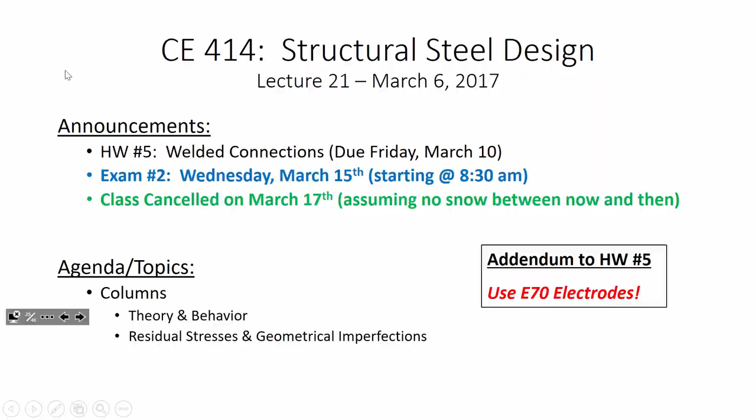All right, so real quick, before I pull up the solution, a couple things. Your homework 5's due on Friday, March 10th, and I didn't actually explicitly tell you what electrodes to use on that homework, so just go with E70. Exam 2, March 15th. Don't forget that. We'll have review on Monday. We'll have the exam on Wednesday, and then assuming no snow between now and then, we'll cancel class on Friday. Sound good?

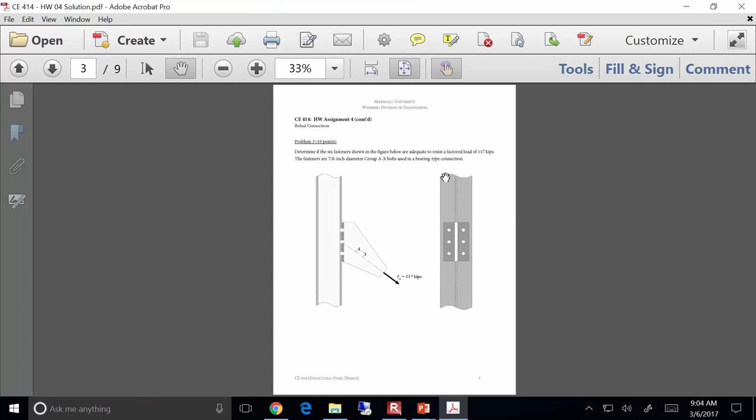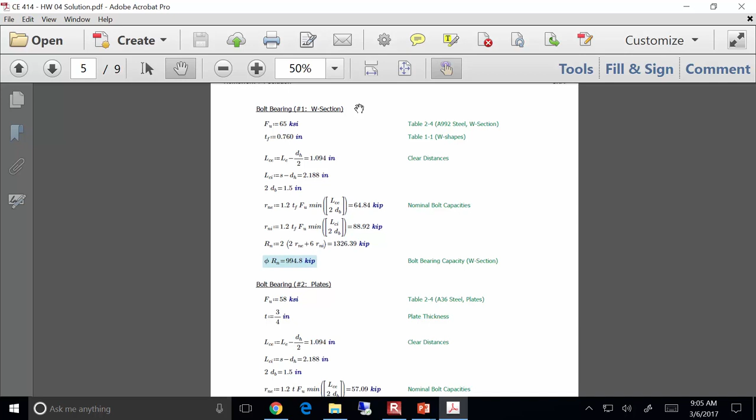Okay. Let me briefly pull up the solution, and like I said, I think everybody did pretty well on the homework. I'll show you the mistake where all the +1 stuff showed up, and it was really right here, and I'm going to pass out a copy of this solution real quick. On problem 1, if you notice, there's 2 cases of bolt bearing: the bolt bearing for the W section and the bolt bearing for the plates. I had the wrong FU value right here, so it was just a typo on my part. But the TA didn't know any better, so he deducted for everybody, grading each problem one at a time. When I noticed it, I emailed the TA and asked him to fix that, and he did. So if you have a +1 on the bottom of your homework, that's where that is. If you see something like "wrong FU" marked on your homework, it should have been corrected.

All right. In the meantime, let me at least go through and pass out the solution. I'd argue this solution is probably a little more hefty, in terms of the next test, than the solution for homework 5, since that's only 1 problem. 2, 3, 5. There's that. 1, 2, 3, 4, 5, 6, 7. 4. 1, 2, 3, 4, 5, 6, 7. Here we go. And 2. Mr. Lewis. Okay.

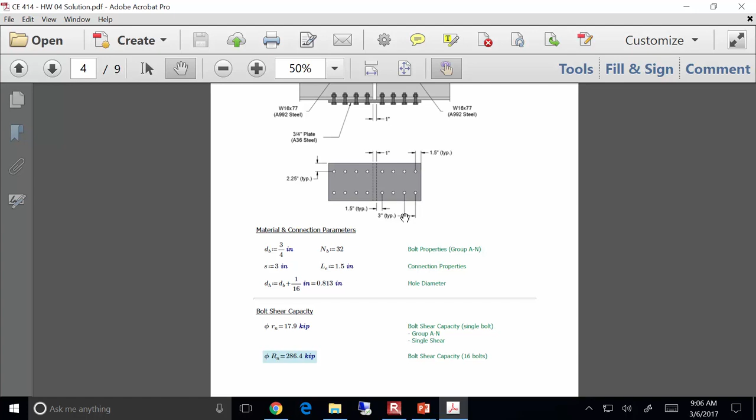So I think the big thing with this homework was that it was pretty repetitive, but it sort of is the nature of the beast when it comes to bolted connections, because you end up checking bolt bearing at least twice, and it's sort of the same thing on both checks. One of the things I think probably gave a few of you a loop a little bit is if you check the bolt shear capacity of the connection, you get something like 286 kips. But if you check bolt bearing, you're getting some crazy numbers like 994 and 876, and that's fine, okay? Because all that means is that if you start loading this connection, the bolts fail first. That's all that means. There's nothing wrong with that check at all. So the actual capacity of this connection would be the 286. You don't know that until you go through and do the math and check it out.

I'd say that for connections that have a large number of bolts, it's a pretty common instance that bolt shear governs, because a lot of bolts means there's a lot of plate you've got to fail in order to fail that connection. Okay, so that's problem 1.

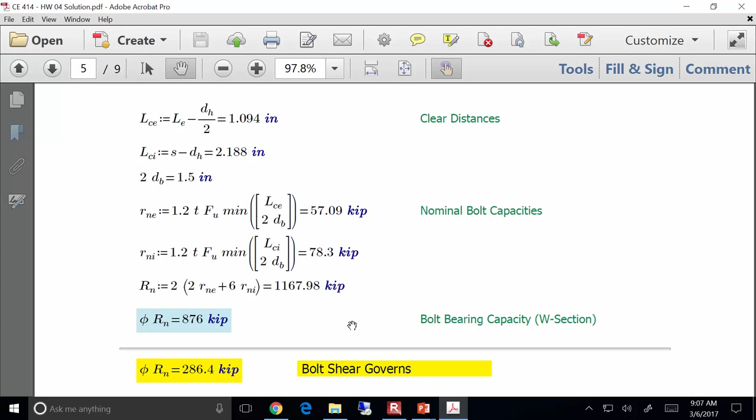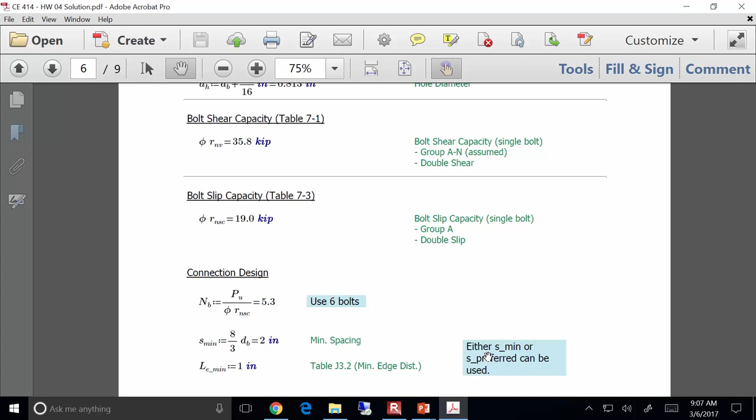Now, I imagine on problem 2 there are probably going to be some differences on the actual connection layout. In other words, do you use the minimum bolt spacing or the preferred bolt spacing? In my solution, I use the minimum, because first off, you get nice, easy dimensions. They're all 2 inches and 1 inch. It's pretty straightforward. But I wanted to show you that minimum will work from a bolt bearing standpoint. So if S minimum works, S preferred is obviously going to work.

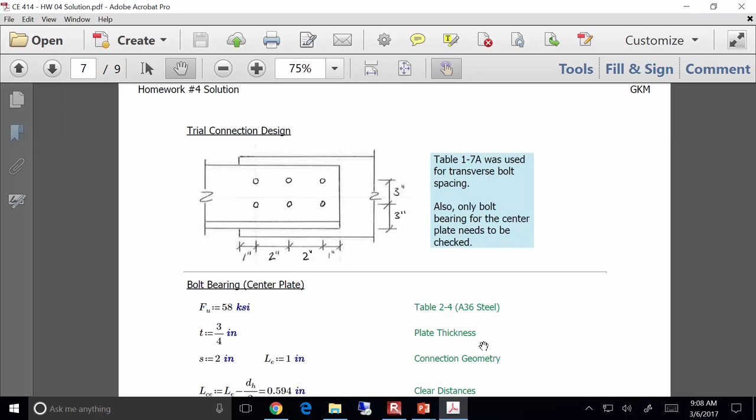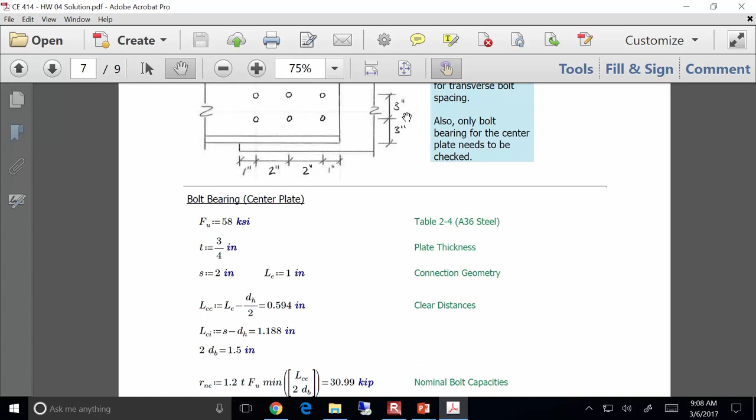So here's the trial connection design. There are 6 bolts. The edge distance is 1 inch and the bolt spacing is 2 inches. If you go through and do the bolt bearing calcs, you only need to do it on the center plate, because there's a lot less thickness of material in that center plate as opposed to the angles. You find that when it's all said and done, it works.

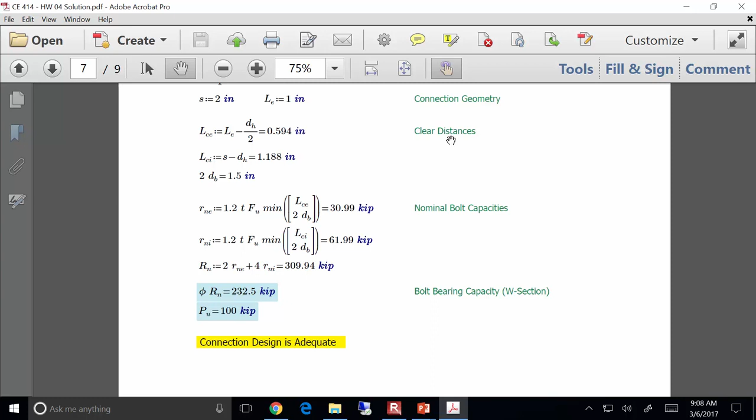Now, some of you look at these 2 numbers and go, well, gosh, that connection's not very efficient. But when you do that, you're forgetting that there's bolt shear, bolt slip, and bolt bearing. The value that governed the design of this connection, if I remember correctly, was bolt slip. The capacity per bolt is something like 19 kips. So what's 19 times 6? 60 and 54, so that's 114. So the actual governing capacity of this connection is 114 kips. Take 100 and divide it by 114, and there's your efficiency.

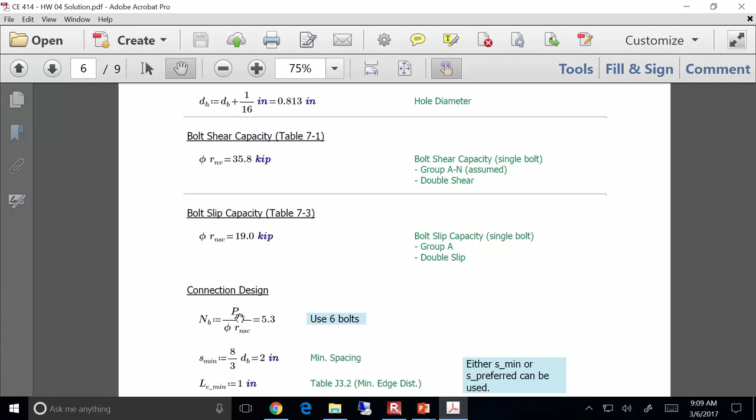Now you can find that bolted connections, by their very nature, are a little less efficient than a typical member design. When you do the math, you find that you need 5.3 bolts, so you round that up to 6. You're actually rounding that up quite a bit. So your efficiency for connection design, especially with bolted connections, can be a little lower than you'd like, but it's really just the nature of the beast in regards to bolted connections. Does that make sense? Everybody okay with that?

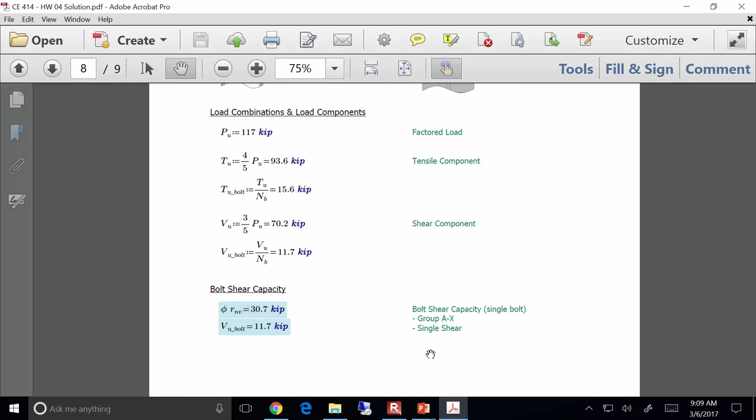Problem 3, I think as long as you were being diligent in your numbering and your naming and your labeling, was pretty straightforward, pretty plug and chug. You find that the connection is adequate. Does anybody have any questions at all about any of this?

And it would have worked. Did you get docked? You did get docked. I used S preferred, so I got something different than what's on here. I wasn't aware the TA did that. How many of you used S preferred and got docked? I need hands raised. How many? Just 2 of you? All right. You come see me a little bit after class. I want to look at that because you shouldn't have gotten docked. He's a human being. If he made a mistake, I'll be happy to fix it. All right. Sound good? Everybody else good?

Okay. So are there any questions on the welded homework? I get the feeling not everybody started it, but it's a really short homework, so it should be pretty straightforward. Everybody good? All right. If that's the case, I do want to get into columns today.

I'm going to go ahead and level with you. Things get a little different in here, starting with columns and beams. I would argue the analysis and design aspects associated with columns and beams are a 180. We're entering a little bit of a different world. I'm going to have to bring up a little bit of the C word, a little bit of calculus, but it won't be so bad the way that we handle it. We enter a whole different type of discussion starting now and throughout the rest of the semester, because with columns and beams we now broach a completely different topic of structural engineering, and that's the topic of stability.

We've been talking about, up until now, things that are being yanked on. Tension members, even if you're talking about bolted, welded connections, regardless of the complexity associated with the geometry, in the end you have a series of plates going this way and a series of plates going this way, joined with either bolts and welds, and they're being yanked on, essentially, in some fashion.

That's the nature of tension members and bolted and welded connections. And ultimately, our limit has really been something like fracture or bolt shear. And the design aspects have been pretty straightforward. I mean, say what you will, but theoretically, the design of a tension member is pretty simple. You have the load, you have the stress, divide to get the area, right? That was really it. You have bolts, have the load, capacity of one bolt, divide to get the number of bolts. It's pretty simple. Well, that stops right now, because with compression members, it's not so simple.

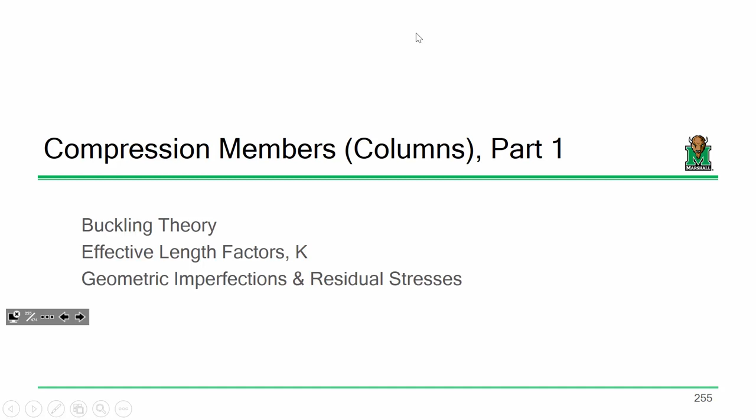Things that are in compression like to do stuff that things in tension don't like to do, specifically things in compression like to buckle, okay? So we need to talk a little bit about buckling and how we have to adjust our theory to handle real-world behavior. So we're going to find a term pop up that we've seen before, and it was just sort of a passing thought, which is going to become really important to us now. Things in compression like to buckle, and specifically a column's strength is a function of its slenderness.

You remember how we defined slenderness with tension members? How did we define slenderness? L over R, okay? Now, that's the same thing for us in columns. Although specifically it's going to be KL over R because we adjust that by the column's effective length. But slenderness is really going to be a very important parameter for us. And we're going to find that columns behave differently depending upon their relative slenderness values. For instance, I would say columns that are short are the only columns that can really be loaded to the yield stress. The longer a column gets, the weaker a column gets.

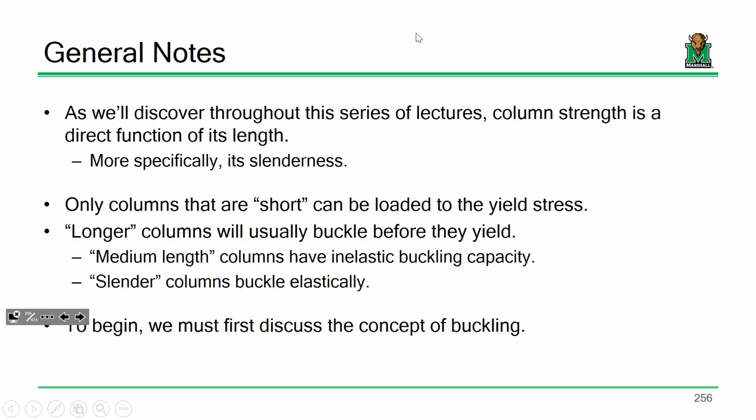And that wasn't the case with a tension member. We didn't really care how long the tension member was for its capacity. I mean, the capacity of a tension member was 0.9 Fy Ag and 0.75 Fu Ae. The length didn't matter, okay? For columns, that's going to matter, okay? And we're going to have differences between whether or not a column buckles inelastically and whether or not a column buckles elastically. There are going to be differences in behavior. But before we even get into that, we got to go into buckling.

Now, if you had me for deformable, we did talk about buckling at the end. If not, no big deal. I do want to at least go through some of the basic theory. So, you imagine you've got a yardstick in your hand. You take that yardstick and you push on it. The yardstick tends to want to bow out, right? You push it, and whoop, it starts to bow out. That sudden loss of stiffness is what's called buckling. Buckling is a geometric loss of stiffness due to loads in compression. By and large, that's a general description for it.

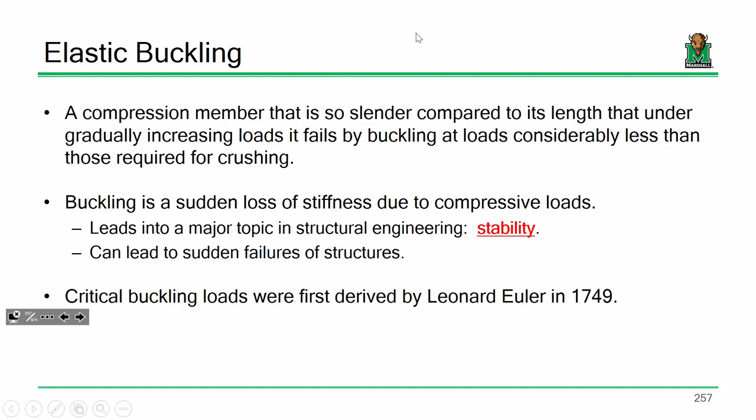It's an old idea. I mean, the equations for Euler buckling were derived back in the 1700s, so it's not a new concept. Some of you probably remember the equations for Euler buckling. Now I'm going to show them to you, and then I'm ultimately going to show you why they're wrong. Or wrong's maybe a bad word. Maybe the best word is they're not accurate enough, and we'll go into why that's the case. But first off, let's just sort of go back to basics. So let's consider we have a pin-pin column.

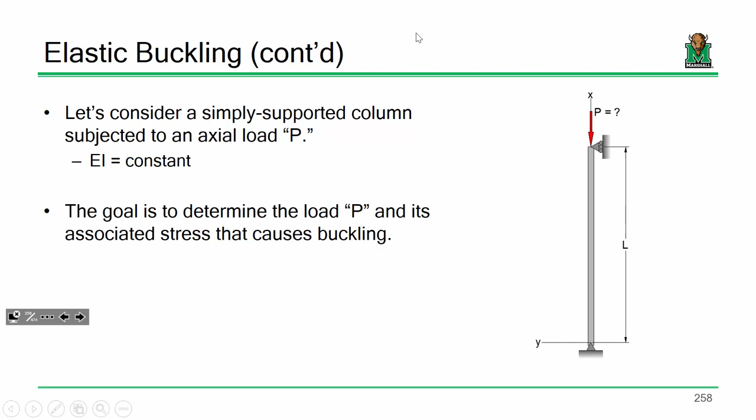So instead of a pin-pin beam, we're talking about a pin-pin column that's being loaded in compression. So that column has some length L. It has some modulus of elasticity E and some moment of inertia I, right? So I've got some load on it, and I want to determine the amount of load that will cause that column to buckle, right? Now, would you agree that if I load that column in compression, that when it buckles, it's probably going to look something about like that?

Fair statement? Okay. So that's number one. Number two, if I've got P going down, statics tells me I have to have P going up. Fair point? Okay. All right. So you know me, my favorite weapon is a samurai sword or a lightsaber, or in this case a box cutter. I cut right through the column at some distance x from the bottom, and I get a situation that looks something like this. So statics tells me that if I've got P going up, I've got to have P going down. But because this column is deflected out a little bit, I'm proposing that there's a little bit of moment in that column. And that moment is directly proportional to how much it's deflected out.

If I cut a section, that column is deflected out, we'll call it some distance y. So if I sum moments at the cut, I've got some moment going like this, and I've got P at some distance y going like that. So the moment inside that column is P times y, or negative P times y because of our sign convention. Everybody okay with that? Any questions?

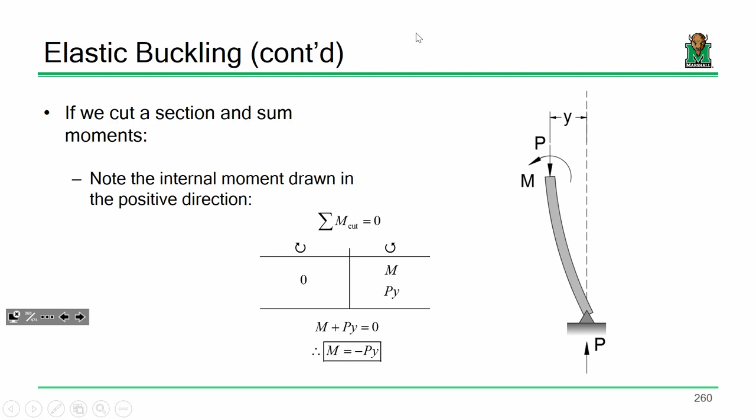All right. So let's go back to some basics. Whether or not you had me for deformable, you definitely had me for structural analysis, and I know you remember that the second derivative of deflection is M over EI. It was a very fundamental relationship that we established in structural analysis to be able to determine deflections in beams. We're still talking about the same scenario, an element undergoing bending deformation. So the second derivative of deflection is M over EI. Everybody remember that?

You're giving me that look. You remember that. I know you do. All right. Yes, you do.

So if the second derivative of deflection is M over EI, and M from our equilibrium analysis was negative Py, I can plug and chug and I can get this. Everybody okay with that? Now, I'm going to simplify it a little bit. I'll move this over here, so I've got y double prime plus P over EI times y equals 0. To make the math simpler later, I'm going to define P over EI as an arbitrary constant and call it alpha squared. What that yields is a second order differential equation, second order because we have two derivatives. Everybody all right with that?

Now, I see some people going, no, sir. You've got a second order differential equation, and a number of methods that you can use to solve it. I'm going to use the one that I think is most popular among college students. So, y double prime plus, since I don't have alpha, I'll just call it A. This is a very common differential equation: y double prime plus A squared times y equals 0.

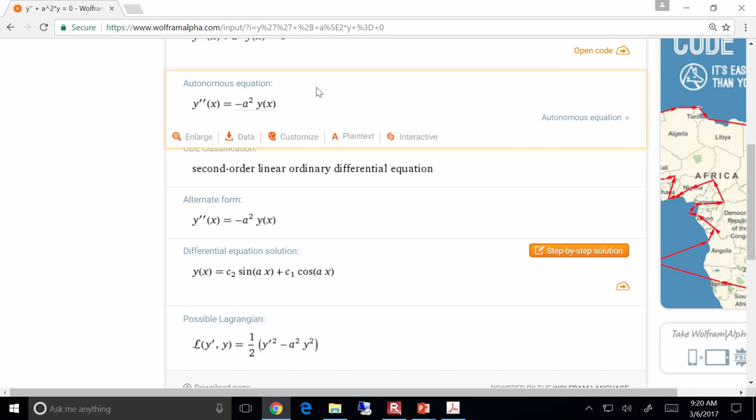Now if you want, you can do the mathematical process: write your characteristic equation, get imaginary roots, and recognize that imaginary roots are conjugate pairs, sines and cosines, if you've had differential equations. I'm being facetious, but in all honesty, this is not a very difficult differential equation to solve. It's pretty straightforward. If you've got a differential equation in this format, then the solution is some arbitrary constant times the cosine plus some arbitrary constant times the sine. The reason I called that term alpha squared is because the solution yielded alphas. Everybody okay with that?

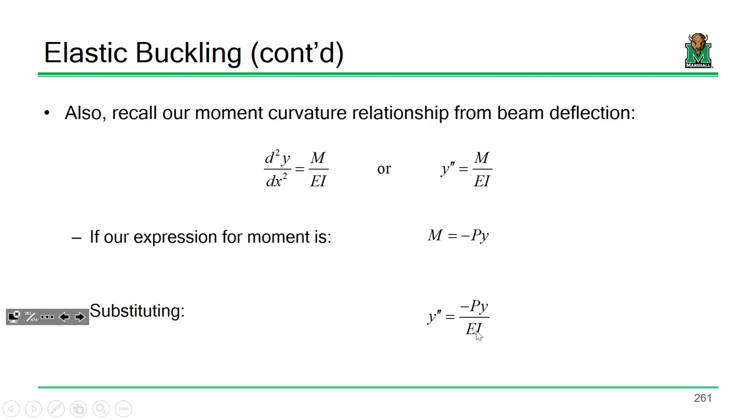Now, in the world of differential equations, when you have a solution, in general it's a function of arbitrary constants. In this case, it's a function of C1 and C2. In order to solve for those arbitrary constants, I need some boundary conditions for the problem at hand. Here's the problem: a column undergoing compression. Our boundary conditions are that the deflection here and the deflection here are 0. That's what those supports are doing. They are restraining that column from deflecting at those points. So we can solve for C1 and C2 by stating that the deflection at x equals 0 and at x equals L is 0. Everybody okay with that?

Now, here's our differential equation. Let's take care of the first one, the deflection at 0. Plug in 0, so C1 times the cosine of 0 plus C2 times the sine of 0. The cosine of 0 is 1, the sine of 0 is 0, and I get that. Everybody okay with that? So this term goes to 0. Now our second one, deflection at L equals 0.

So plug in x equals L, all that must be equal to 0, and we get this. Okay? This gives us a few problems from a theoretical standpoint, because we have C2 times the sine of alpha L equals 0. Okay, this is an equation. C2 times the sine of alpha L equals 0.

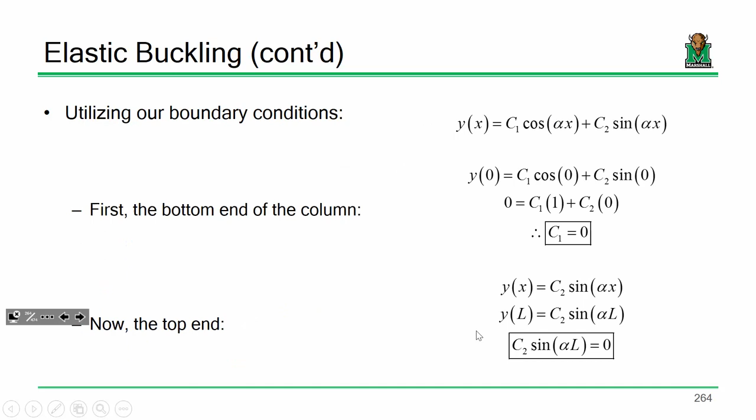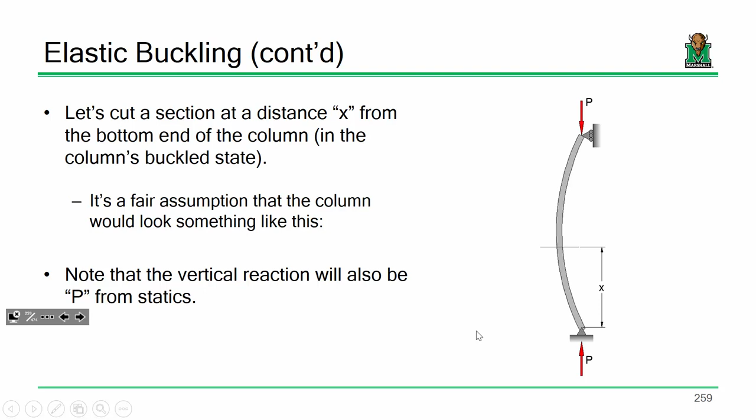So for that equation to be true, a number of different things can happen, but a lot of these yield trivial solutions. For instance, for this equation to be 0, would you agree that C2 could be 0? That's a possibility. The problem is that if that's 0, and that's 0, well, there's no deflection, right? And we know that's not the case because that's what the column looks like. So this indicates a trivial solution. It doesn't really tell us anything.

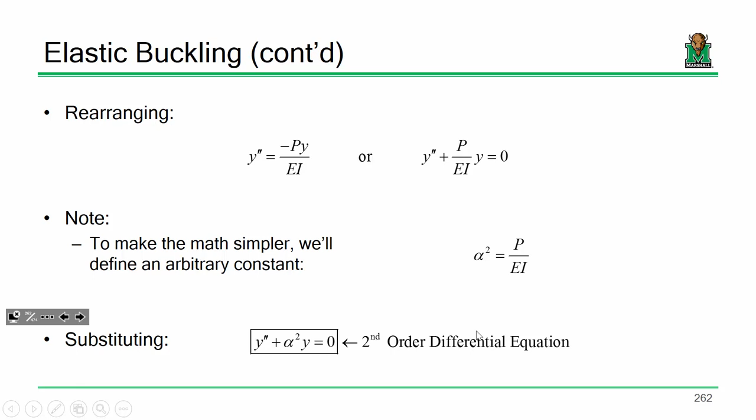One way that this equation could be 0 is what if L is 0? Well, think about it. If L is 0, then you have the sine of 0, which is 0, right? But that indicates a column that doesn't have any length. That doesn't make any sense either, right? What about alpha? Well, alpha could be 0, but if you recall, this is alpha, so if alpha is 0, that's sort of indicating that the column doesn't have any load on it. That doesn't make any sense either, right? Now, what about this entire sine term? What if that is equal to 0? Well, maybe that's not so trivial.

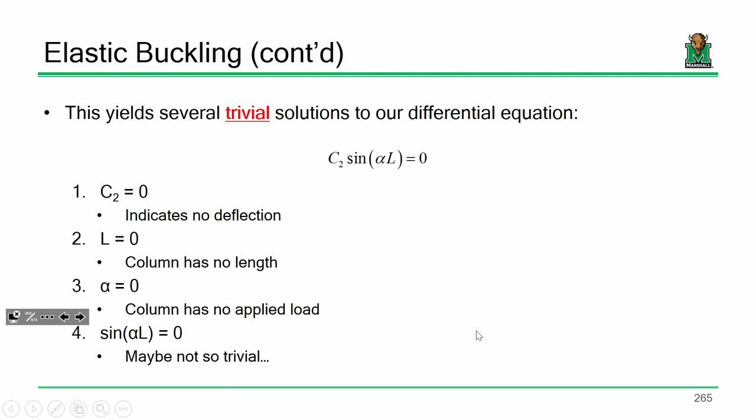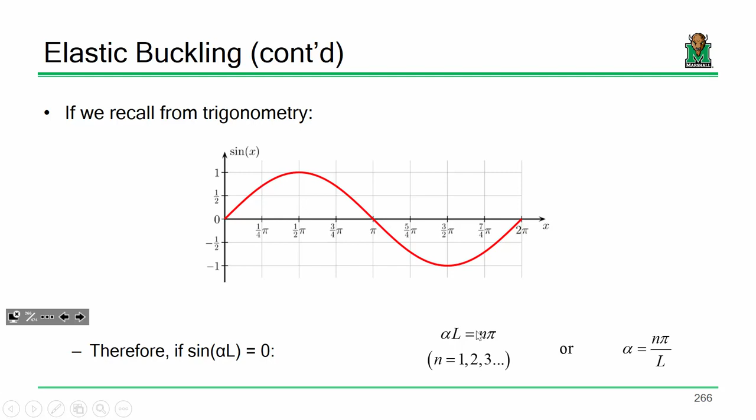If you recall, the graph of the sine function looks something about like that, right? And the sine function equals 0 at integer values of pi, right? At 1 pi, 2 pi, 3 pi, 4 pi. That's where the sine function equals 0. So I can solve for alpha, and I propose that alpha equals n pi over L. That will tell us the critical load that will cause that column to buckle. So here's alpha right here. I can square that, but then I know alpha squared is also P over EI. I can just plug and chug and solve for P, and I can get a nice little expression for the load that causes that column to buckle.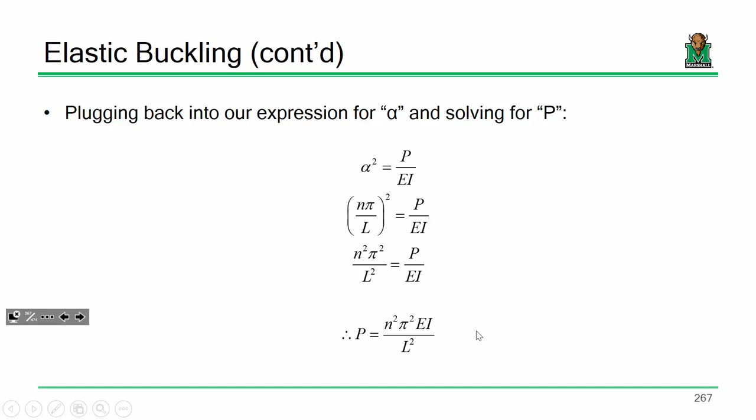And we're going to see in a second, since our first mode is the critical buckling mode, pi squared EI over L squared, that's our critical buckling load for a column. But is everybody okay with this so far? Okay. So recognizing that the sine function is the only one that gives us the non-trivial solution, we can plug and chug and get a nice little expression for deflection.

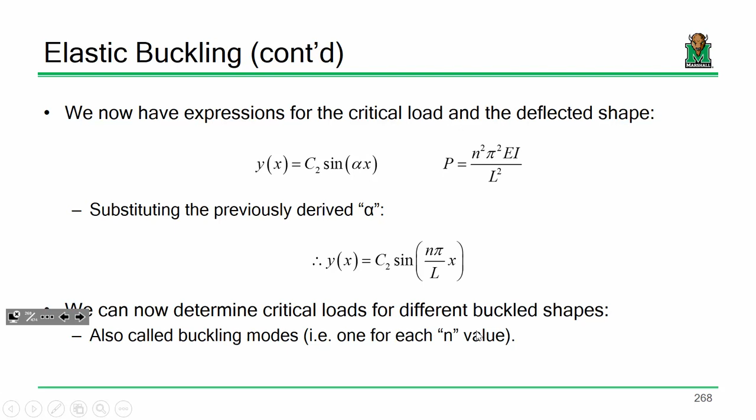Now these little n values are the only ones that I haven't really explained in detail. Each of those n values is associated with what's called a buckling mode. In other words, what the shape of the column looks like after it has buckled. So they're sort of arbitrary, but there's a very clear physical understanding if you get into it. Recall that this is essentially a bunch of sines and cosines. Well, if you set n equals 1 and calculate not only the load, but the buckled shape, our buckled shape is essentially a big sine function, it looks like this.

So here's n equals 1, and here's the resulting buckling load. Here's n equals 2. Notice how we got sort of 2 sine waves. So the column's sort of doing that, okay? And here's our resulting buckling load. Here's n equals 3 and our resulting buckling load. Everybody kind of getting the general idea? Now, if I actually just take that yardstick and start loading it, which one am I going to hit first? This load, or this load? The one on the left, center, or the right? The left. That's the smallest load. If I start pushing on it, that's the one I'm going to hit first.

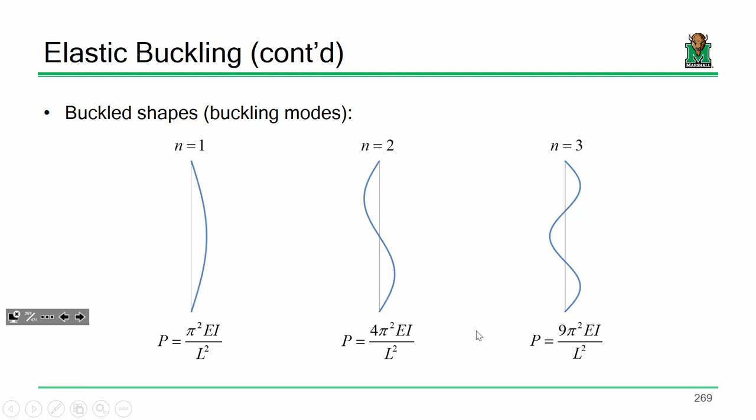So what I'm stating is that right there, this is the critical buckling load for a simply supported column, pi squared EI over L squared. Now, I know the folks who had me for deformable, you probably saw that near the end of the semester. It's been a while, but I know you've seen it, okay? Everybody with me so far? I know you've seen it. You may not remember it, but I know you have.

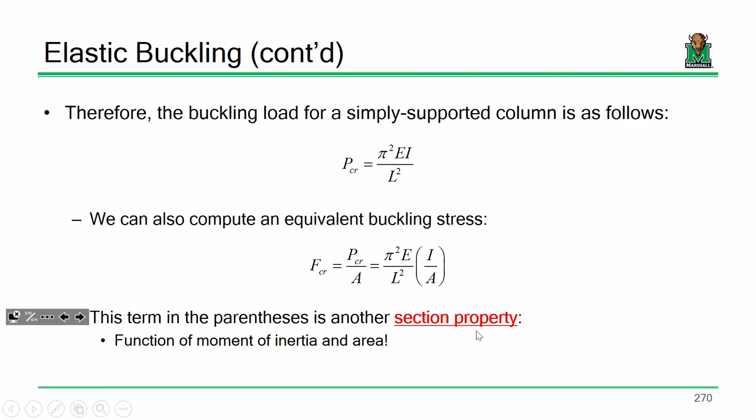Okay. Now, this is the buckling load. The buckling stress, let's just keep it simple. Stress is P over A, right? So if I take this term and I divide it by A, I'm going to pull this term I out, and would you agree with this right here, this I over A? There's a very specific name for I over A, or specifically the square root of I over A, and we call that a radius of gyration. In other words, when we've been looking up these R values for L over R terms, R is just the square root of I over A, and we call that the radius of gyration. Okay? Everybody with me so far?

This is stuff I know. It's been a while since you've seen this, but it is somewhat relevant. Everybody okay? Okay. So what I'm getting at is we now have a term not only for the buckling load,

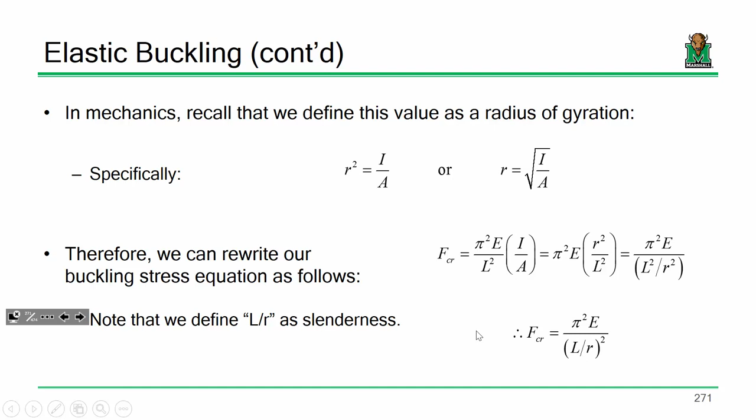pi squared EI over L squared, but we also have a term for the buckling stress, which is just pi squared times the Young's modulus divided by this, which is just the slenderness squared. So far, so good? Now, we made a couple of assumptions when we derived this.

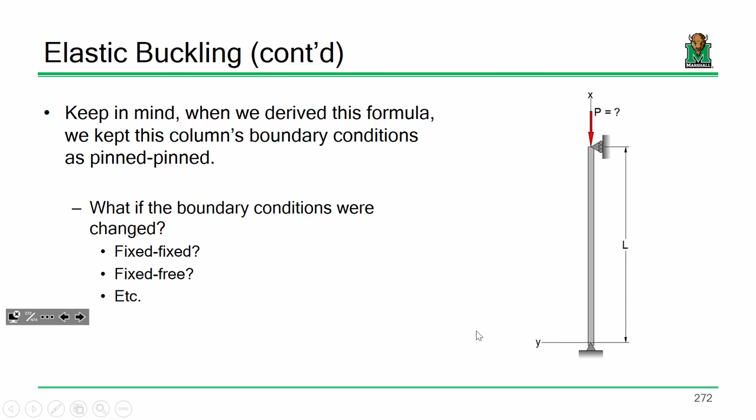So one of the assumptions I'm going to tackle right now is the boundary conditions. For instance, when we derived this column's capacity, or its buckling load, we assumed pin-pinned, right? Well, what if it's not pin-pinned? What if it's fixed-free or fixed-fixed or something like that? I think it stands to reason that this column is going to behave differently than this column. Everybody okay with that understanding?

Okay. Well, one of the ways that we can use this same theory is through the use of what's called an effective length factor. For instance, would you agree that this column, once buckled, probably looks something a little bit like this? Do you agree with that? Okay. Well, I propose if we can relate this to a pin-pin column, we can use the same theory. Now, I'm going to do that through the use of an effective length factor.

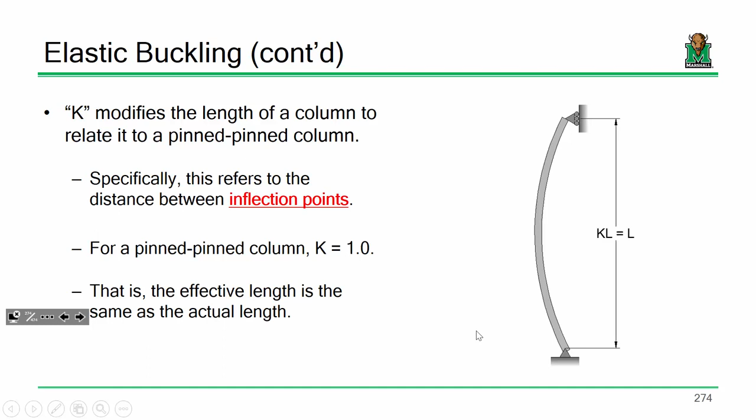And all the effective length factor, or K, is trying to do is relate some random, arbitrary column to that column. So this is sort of our baseline. So for this column, the K value would be 1, a pin-pin column. Well, what I'm getting at is that K is trying to relate the distance between here and here, specifically trying to mimic that buckled shape on some arbitrary column, for instance, like this.

In other words, if I took this column and sort of traced it out a little bit, see how I'm sort of repeating that buckled shape, kind of like that? Everybody kind of see that? So what I'm getting at is that the effective length factor for, let's say, this column would be 2 for a fixed-free column. Because if I took that buckled shape and just sort of stretched it out, that distance between inflection points for this column would be twice its original length, since K is 2. Everybody okay with that? Okay.

So that's where this K term, this effective length factor, comes into play. So this sort of modifies our theory a little bit. Instead of pi squared EI over L squared, it's pi squared EI over the quantity KL squared, or in this case, KL over r. So everybody kind of see where that came from?

Okay. Now, if you go to the manual and notice, got my little star, got my little tabbed region. We're in 16.1-511. So this is actually really deep into the back of the manual. It's actually in the gray pages right back here. This is definitely something you're going to want to tab, okay? So what this does is it will list different cases for your column's boundary conditions, and then based on those cases, what are the resulting effective length factors, okay? For instance, look at the one we just did. The one we just did was case E. If you notice, case E is a fixed-free column, okay? Notice how the theoretical K value is 2, okay?

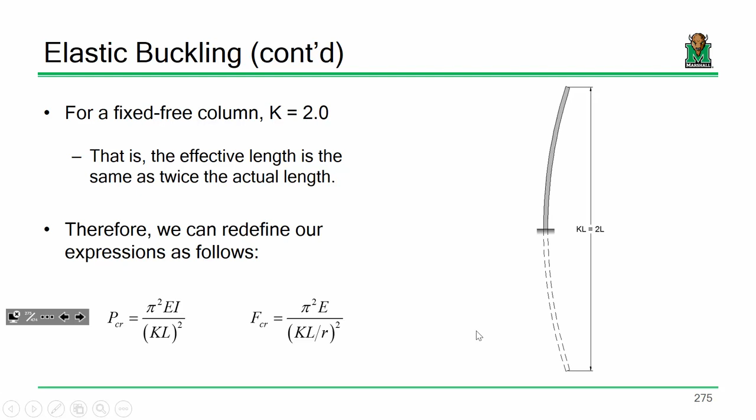Whereas if you start factoring that out, then you're looking at an individual column, not any column. Does that make sense? That's a good point, though, and that's sort of why we leave that there. Sound good? Now, there's a few minor things that we can account for, like twisting and whatnot, which isn't really a major concern for I-beams or W shapes, and then loading through the centroid, which we'll talk about later. But by and large, everything I just discussed is stuff that you learned in 216, fundamental buckling equations for columns. And they're wrong. In all honesty, saying they're wrong is not very fair. Saying that they're not good enough is incredibly fair, okay?

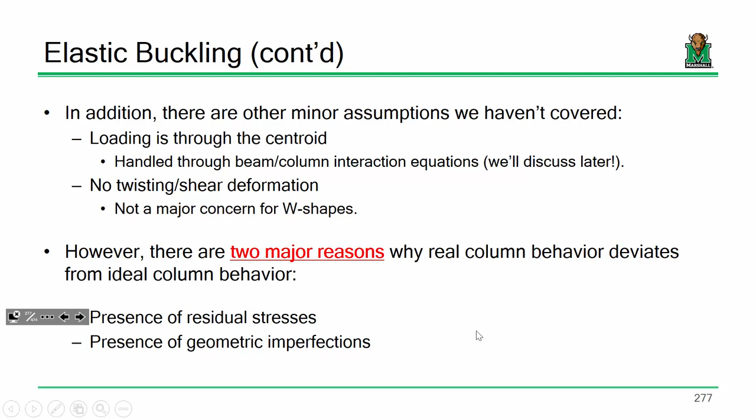And it has a much more profound impact for an element that's in compression versus one that's in tension. I mean, if I have a member that's a little bit out of straight and I'm pulling on it, all the tension is going to do is help that imperfection because it's going to want to make that member become more straight. Make sense? So the point I'm making is I want you to recognize that these things still exist for elements in tension. We just don't really care about them. Okay? Make sense? Okay. But let's talk a little bit about each one of these one at a time.

And I want to start off and talk about these things called residual stresses. Okay? So here is the equation for the critical buckling stress of a column. So pi squared E divided by KL over R squared. Now if I plot that, I'm putting KL over R on the x-axis and the capacity, or the buckling stress, on the y-axis. If I have y equals some constant divided by x squared, that's a hyperbola, right? So the plot of that capacity as a function of KL over R is a hyperbola.

Everybody okay with that? Now, let's also add a little bit of reality to it. I mean, this is a hyperbola, so it goes up to infinity, right? You telling me that a steel column can resist a buckling stress of 946 KSI? No, right? It doesn't really make a lot of sense. So why don't we take that and just cut it off at the yield stress? You know, that sounds reasonable, right? Just cut it off at the yield stress.

Okay. Now I can solve for that point, and I have a point I want to make for this. I can solve for the location where Fy equals this, and I get this term, this slenderness, some constant times the square root of E over Fy. And I really want to indicate that because we're going to see that quite a bit. Some number times the square root of E over Fy. Those are going to show up a lot as compactness limits later on. Okay? All right.

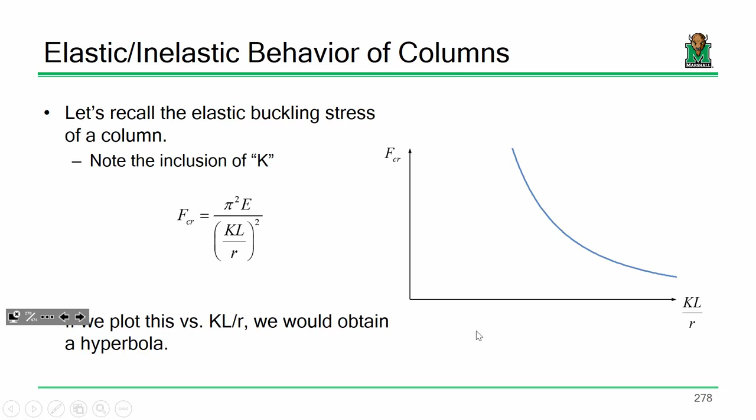All right. One point I do want to make is that would you agree this curve represents the theoretical capacity of a column, right? We're going to take this curve and successively change it to try and represent real-world behavior, okay? And if you look at compression members part 2, if you look at the next handout, go ahead and turn to it and look at the first slide on compression members part 2. Right there, that is the actual column curve that we use in AISC. We'll get to why that is what it is, and we're sort of knocking that out one at a time.

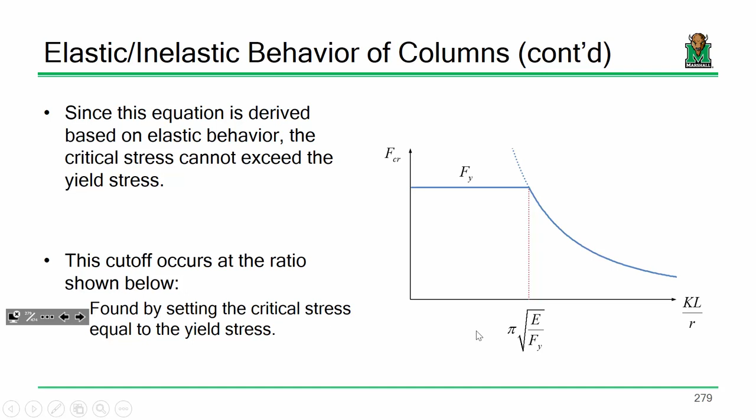Okay, so you agree so far that that's a reasonable column curve. Okay, let's see if we can change that a little bit. All right, so let's look at our stress-strain curve a little bit. Now I'm zooming in a little bit to a particular region on the stress-strain curve. Up until now, we've just been assuming it's linear up until Fy, and then it just yields. But in actuality, there's a little bit of a transition region between when it actually reaches its full yielding and then when it reaches what we call its proportional limit. Remember, its proportional limit is when you start to get that onset of yielding, and then it actually takes a little bit of time for that yielding to progress throughout the section.

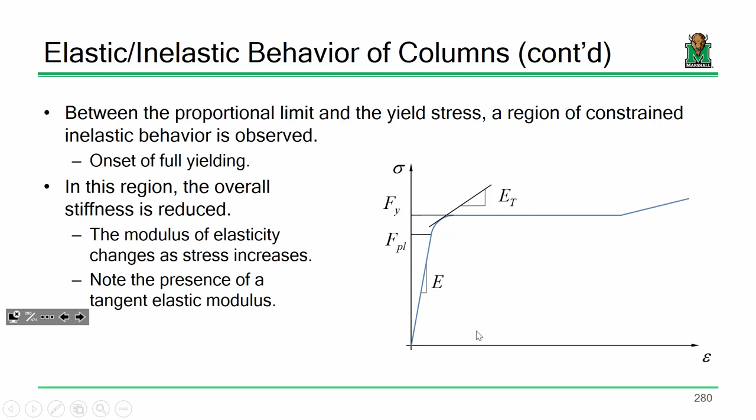Y'all remember that from like what, C321 from civil engineering materials? Huffman probably mentioned that to you. So in that region, instead of dealing with the full elastic modulus, the 29,000 KSI, we're dealing with a little bit of a reduced modulus that's just tangent off that line. So we call that tangent modulus. Okay? Now, that would be fine in and of itself if it weren't for the presence of residual stresses.

Now, residual stresses are something that occur in a wide range of different manufacturing arenas. And in the world of steel production, particularly producing things like a rolled W shape, it primarily results from uneven cooling. Okay? When you buy a W10 by 49 or what have you from the steel mill, there's already stresses locked into it as soon as you picked it up from the shelf. Now, let's be clear, the amount of compression that's in the section has to equal the amount of tension that's in the section, otherwise the beam's running away from you. But there are compressive and tensile stresses already locked in there.

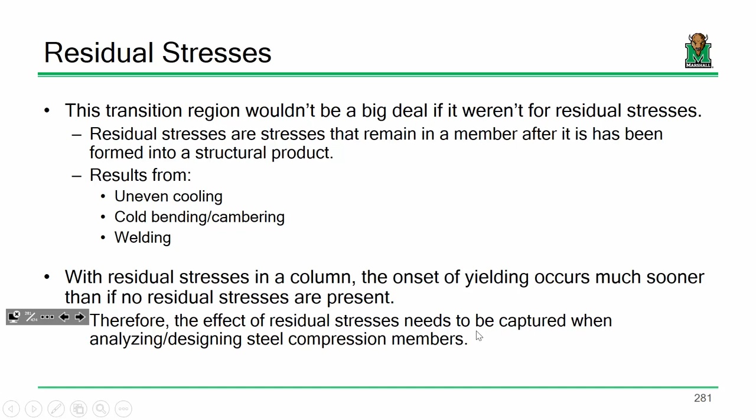Now, for a W-shape, it primarily results from uneven cooling. And what do I mean by that? Okay, let's take an I shape. Okay, now let's be clear. How do you produce that? I mean, you're taking this red-hot billet of steel and successively running it through rollers to produce an I-beam, right? So you're successively flattening it over and over again. So once it's done, that I shape is still kind of hot, right? Then it starts to cool down.

But it doesn't cool at an even rate. In other words, these outstanding elements, like these little flange tips right here and the center part of the web, they cool first. And they cool before these stockier components right here where the flange and the web come together. In other words, I mean, think about it. If I heated that up, the elements that are outstanding, that are the farthest away, they're the ones that are going to cool down the quickest. It's going to take a little longer for all the heat to dissipate out of that flange web junction right there. Does that make sense?

So, I mean, go back to your mechanics. When things heat up, they expand, and when things cool down, they contract. But what happens is this element is contracting at different rates. So what happens is these elements right here, these outstanding elements, they go into compression. But in order to maintain equilibrium, these elements where the flange and the web come together, they have to go into tension to balance out the equilibrium. To give you kind of a simpler idea, as the element is cooling down, it's undergoing all these stress changes. It's almost like the I-beam has these stresses locked in there, and those stresses are always there from the time that the element is produced from then on.

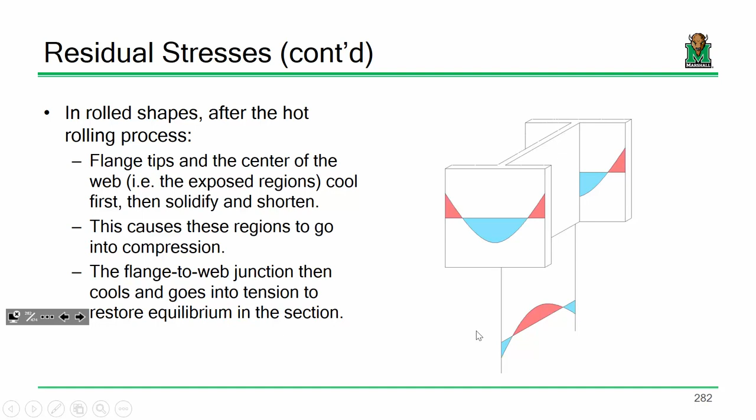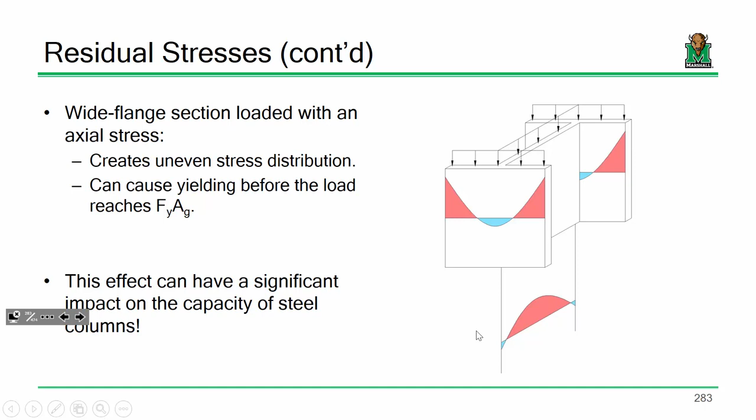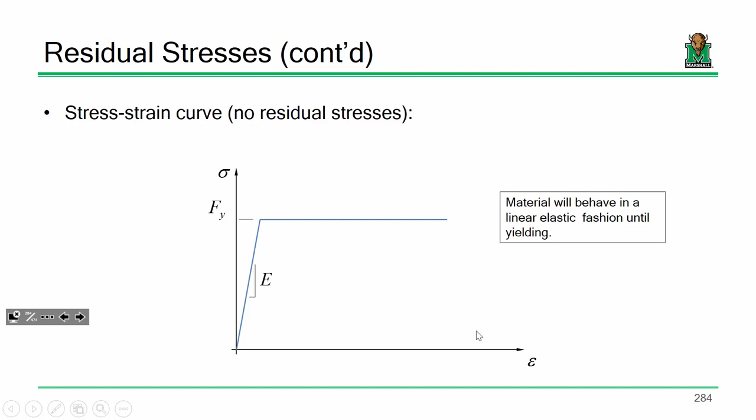See, with tension members, we didn't care about buckling. So our 0.9 FyAg limit, we're talking about all the way out here. We really didn't care about whether or not it was going to buckle. In compression, that matters. Okay? So as we load this, your flange tips are probably going to yield first, then the center of your web, and that yielding is going to progress, and it's going to propagate throughout your section. The more that section yields, the weaker it is. Okay? Does that make sense? Anybody got any questions on that? Yes, sir.

Well, you never want brittle behavior. Never. But your question's a little tough to answer right now. We will answer that later. I would say that we actually would desire more inelastic behavior than we do elastic behavior, but it's from an economy standpoint, and it's not easy to explain right now. We will get to that. Everybody good so far?

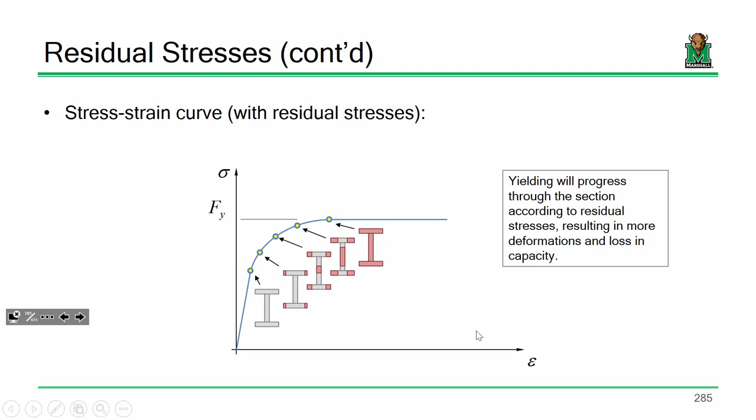All right. So this right here is one of the big reasons why that Euler buckling formula that I presented earlier won't work. The other big reason is what I was mentioning earlier, the idea of geometric imperfections. Columns can generally possess two different types of imperfections. Number one, they can have an initial out of straightness. In other words, the column has some bow to it. Or they can have an initial out of plumbness. So here's the column, but it's off a little bit. Again, we're not talking a 12-foot column that's off 8 feet. We're talking a 12-foot column that's off 1/8 of an inch or 1/4 of an inch.

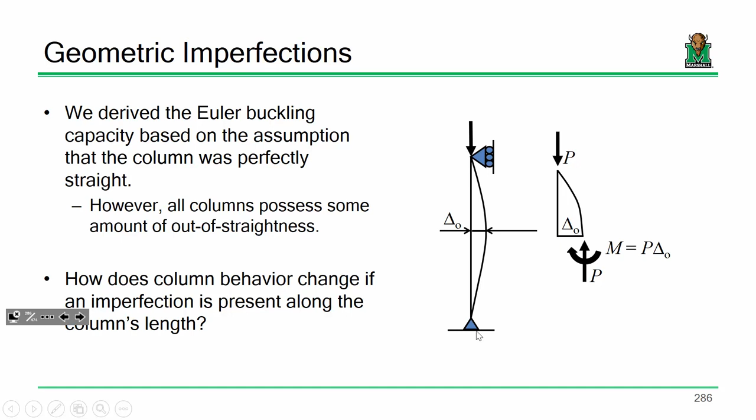I mean, you cannot tell me with specificity that there's such a thing as a perfect column. There's always going to be some level of out of straightness or out of plumbness. It's all about, is that out of straightness or out of plumbness tolerable? Is it within tolerance? So it is going to be there. The problem though is that initial out of straightness and out of plumbness is going to affect the capacity. So this would be the buckling curve for a column that's perfectly straight. That theory that I derived earlier when I used Wolfram Alpha and solved for my boundary conditions, I'm using what's called bifurcation theory. Bifurcation theory basically states that the column is either buckled or it's not. So I'm loading the column, it's straight, and then I hit that magical load and suddenly it buckles. Now you probably kind of get that understanding. If you had a really rigid, perfectly straight column, it sort of suddenly buckles on you.

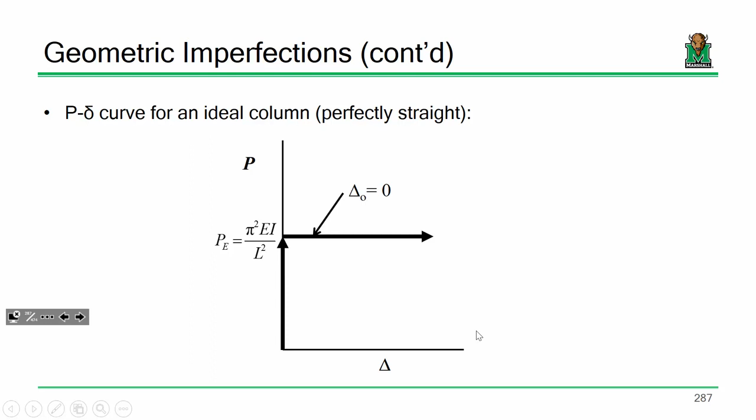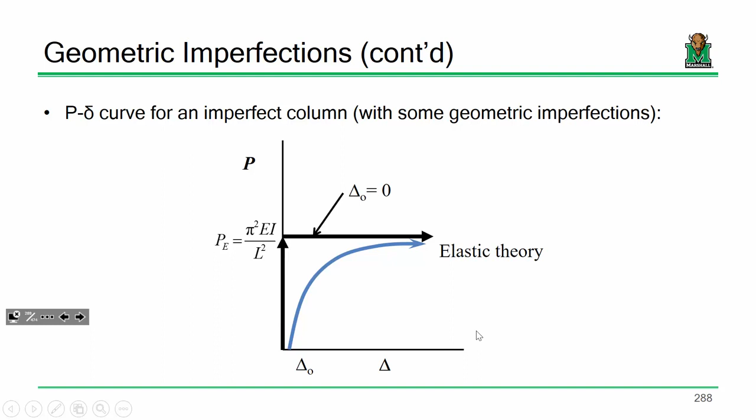But in actuality, that's not what really happens. What really happens is those deflections and those imperfections sort of build on one another. It's kind of what I was mentioning with the backpack. Kick over, a little bit of deflection, a little bit more kick over, and it sort of builds on itself. That's what's called a second order effect, the idea that those deflections build on one another. Does that kind of make sense? Everybody okay with that? And then if we add the fact that we've got inelastic residual stresses, the column's behavior gets even worse.

You are the man, because yep. Sign-in sheet. So here's what I'm going to do. I'm going to put the sign-in sheet right here. Some of you are leaving, so you can just sign it on your way out. And those of you that are in concrete can just sort of sign it between now and then. Does that sound good? All right.

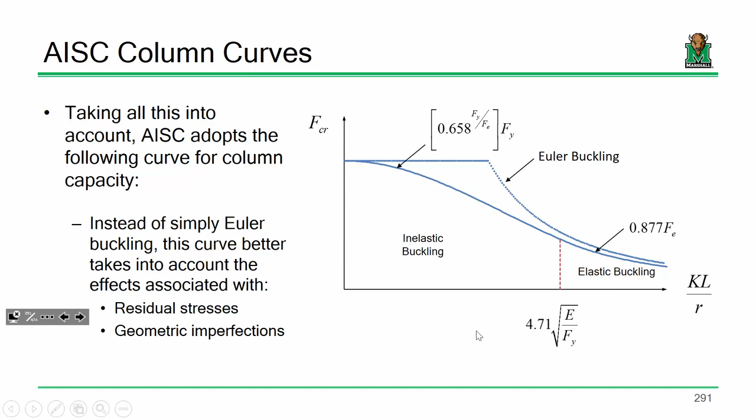Hold on, let me, well, actually not really. If you want, you can tab that table. I have one there, but you really don't need one. So I'm going to go ahead and stop this since we're done here.